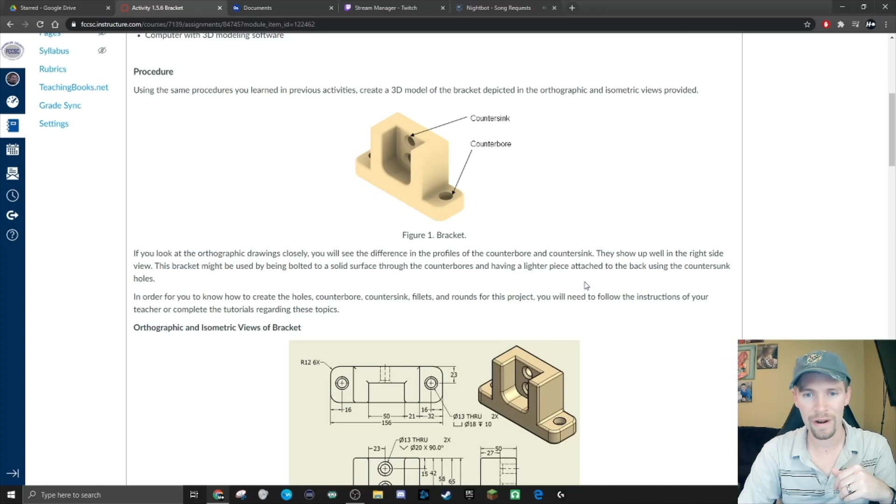If you look at the orthographic drawing closely, you'll be able to see the differences of the profile between the counterbore and countersink. These are two new types of holes that we haven't used yet, but I will show you how to use those here in a bit. In order for you to know how to create holes, counterbore, countersink, fillets, and rounds for the project, you'll need to follow the instructions of your teacher, which is why I'm making this video.

So we're going to actually go to Onshape. We need to be in our folder with your name in your practice folder, and I took all the other documents out just to keep it clean, but you can leave yours in there. We're going to go ahead and create a new document, and we're going to call this bracket. You can probably call it 1.5.6 bracket.

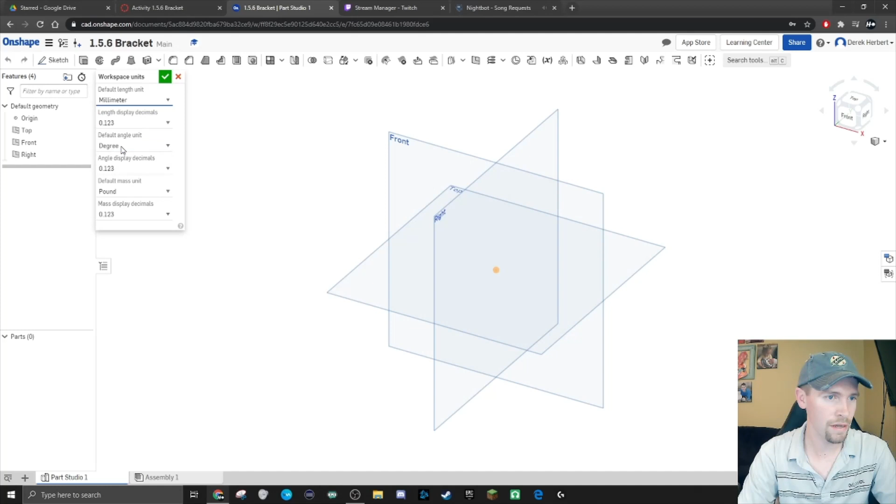Now once we're in here, back when we used to use Autodesk Inventor, we'd have to actually create a new millimeter document. And here it's really easy. We're going to go to this little 3 lines document menu, click on workspace units, and click on millimeter, then save that.

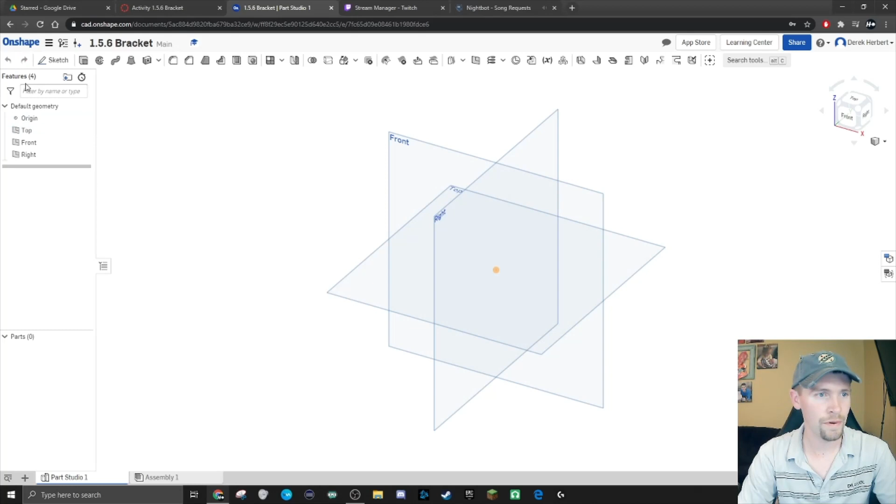So now if we go back to our instructions, we selected millimeter. We're going to sketch a rough rectangle. We need a 50 by 156 rectangle, and it looks like we need it longer than it is tall. So to start a sketch, we're going to click on sketch, click front view, click front on the view cube, right click, and hide all planes.

And we're going to sketch our rectangle up here. Corner rectangle, not a triangle, don't need any triangles in here. So it needs to be 156 wide. 156, enter. And is it 50 tall? Double check, yes, 50 for the height, enter.

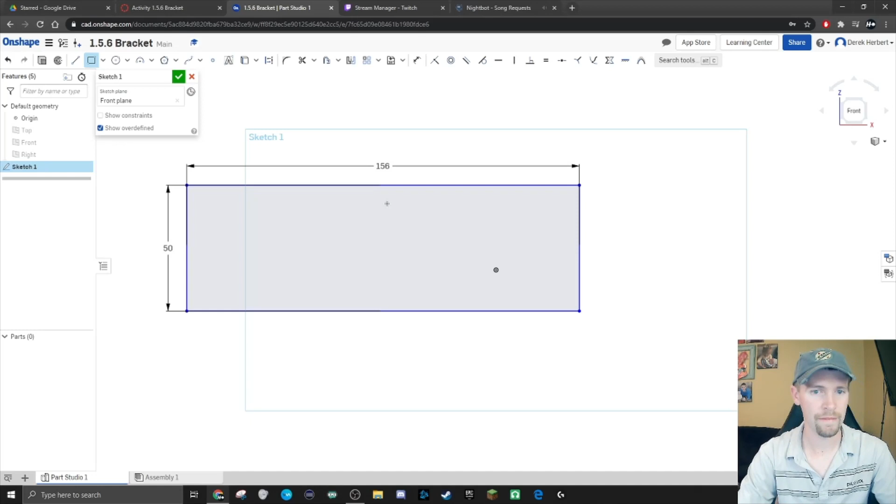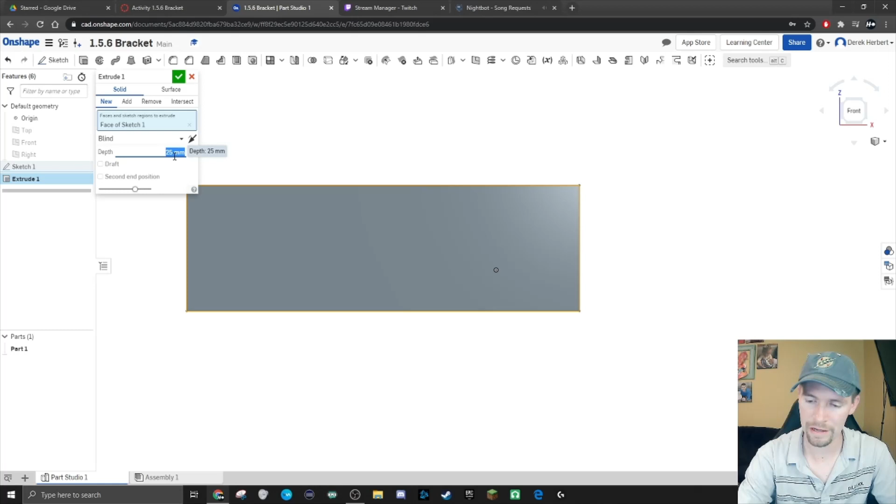That doesn't look right. Why does it not look right? 50 by 156. Alright, it looks good. And extrude 87. So 50 by 156, finish sketch with our green check mark. And extrude 87, maybe that's my issue. Extrude 87 millimeters. Let's check out and see what we got.

There we go. Okay, so it's just looking kind of funky. I don't know why it looks funky. That doesn't make much sense to me. But okay, save it as bracket. We already saved it, great.

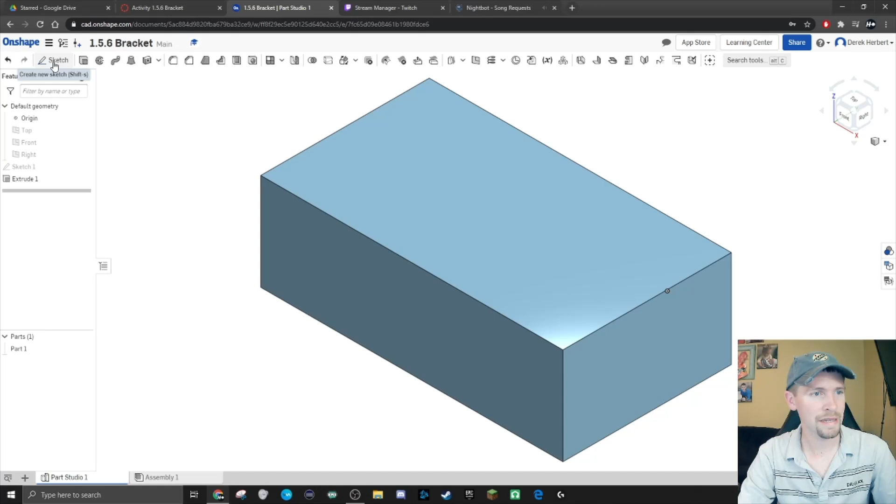So now we will cut away the sides. Create a new 2D sketch on the largest face of the part. So our largest face is up here. We're gonna click sketch, click on the largest face of your part, which is up here. I'm gonna click over to the top, and now we can start sketching.

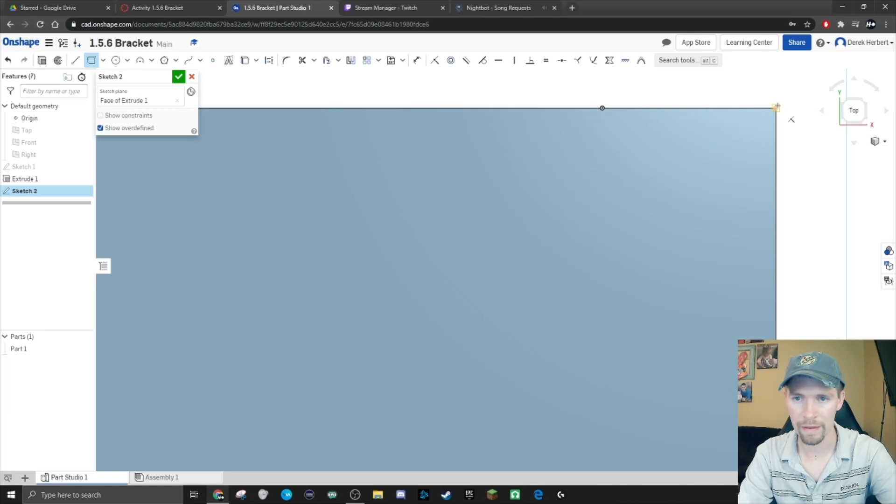So using the rectangle, draw a rectangle in the corner. Add dimensions shown, so it's 32 by 65, and extrude it. We're gonna make a corner rectangle up here in the top corner. Oh, I am not right on the corner, that's bad, we gotta be right on the corner. Perfect, okay, and it's 32 wide, 65 tall. 32 by 65, and we have our corner.

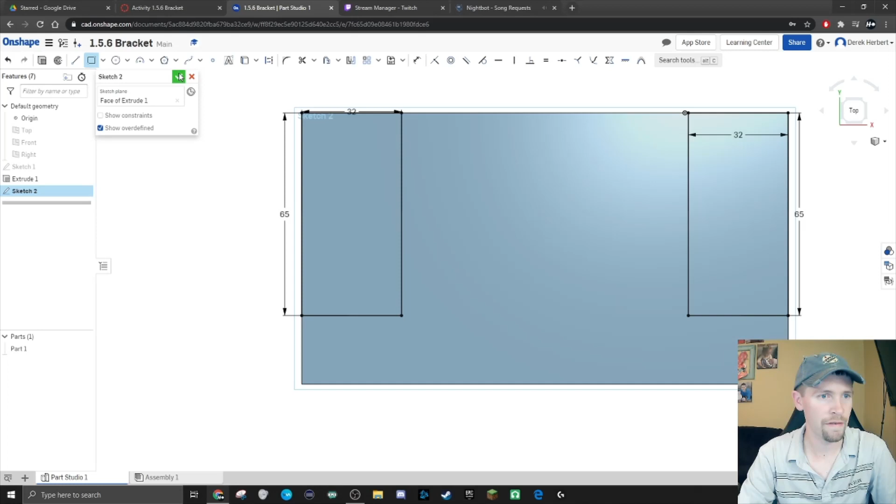Excellent, we're gonna do the same thing on the other side. 32 by 65. And we're gonna finish the sketch. I think we're going to extrude it. Extrude both of these, we're gonna remove it, and we're gonna go all the way through all. Slicing and dicing.

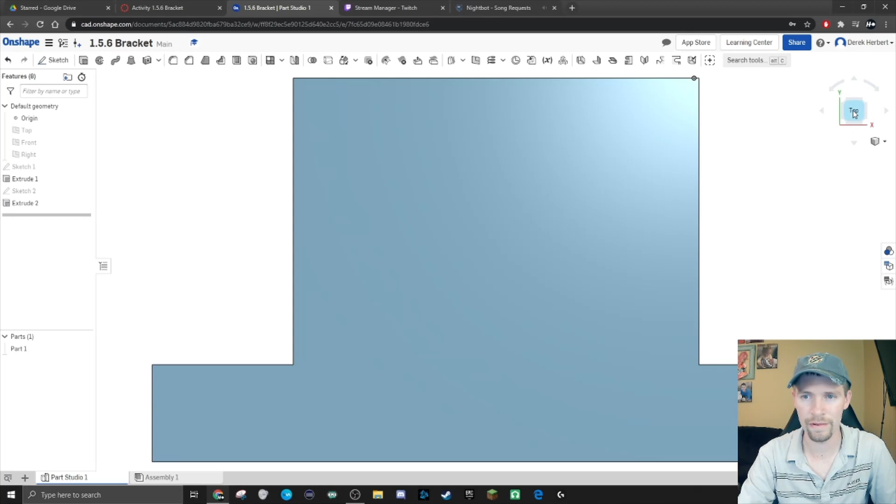Alright, excellent. Oh, I do not like that though. Come on, rotate it just enough. There we go. I need to figure out a way to set this as my home view, that would be nice, or even to make this my front. Create selection... no, I don't know if there's a way to turn this to my front or not.

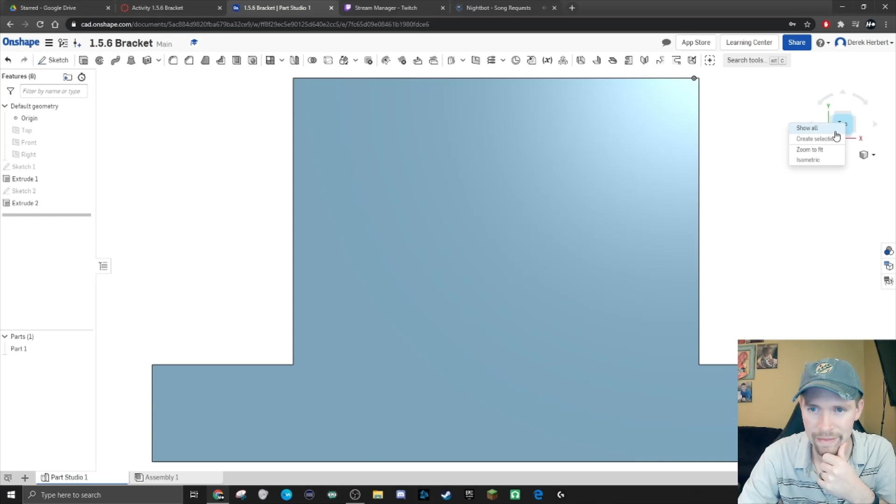I just don't like that, that's kind of annoying. So you can use the right click on your mouse to turn it sideways a little bit if you want to go to that isometric view, which is fine. I wonder if there's a way to make that part zoom to selection. I wonder if you know what, you can make this front face.

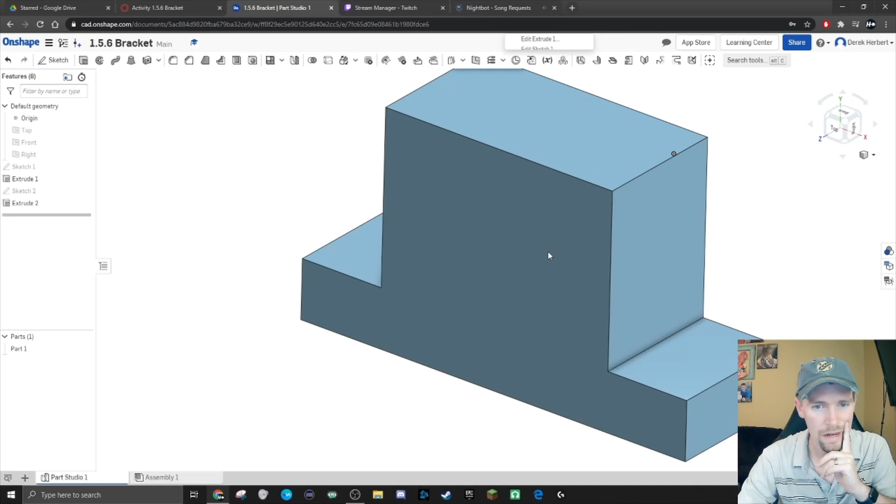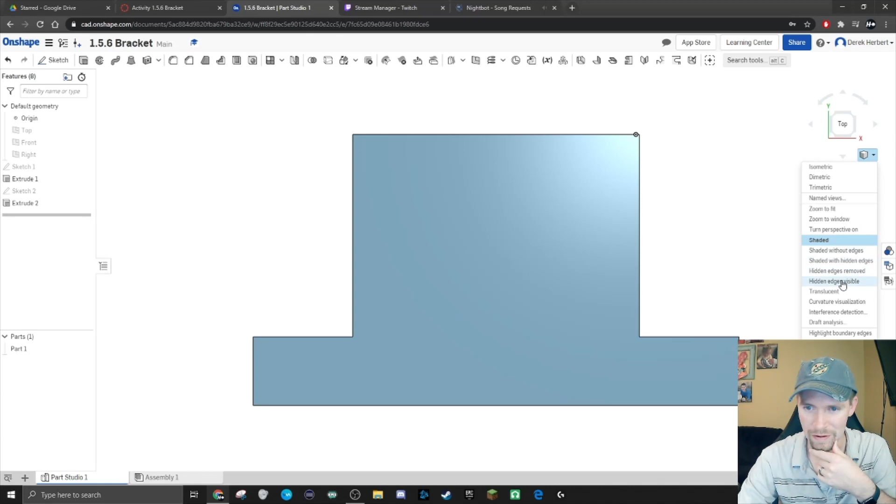Oh, I don't see it. Make transparent, export, clear selection. Nope, okay, well that's nice. I want this to be my front view. I can't do it. Turn perspective on? No, definitely not. Okay, whatever, not gonna work for me. We'll move right along.

So we cut that off. We're gonna cut this off too. So it's 50 across, 21 millimeters from the side, and 29 millimeters from the bottom.

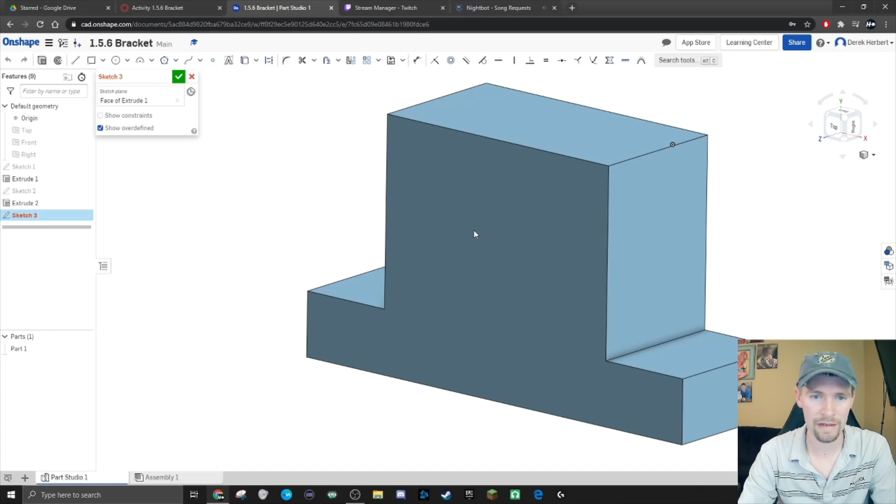Let's go back to Onshape. We're gonna make a sketch on this face and view normal to it so we can look straight at it. Make another rectangle up here on this line. We don't know how tall it is, but we know how wide it is - it was 50, so we'll type in 50 there. We're gonna leave this one blank down here for now.

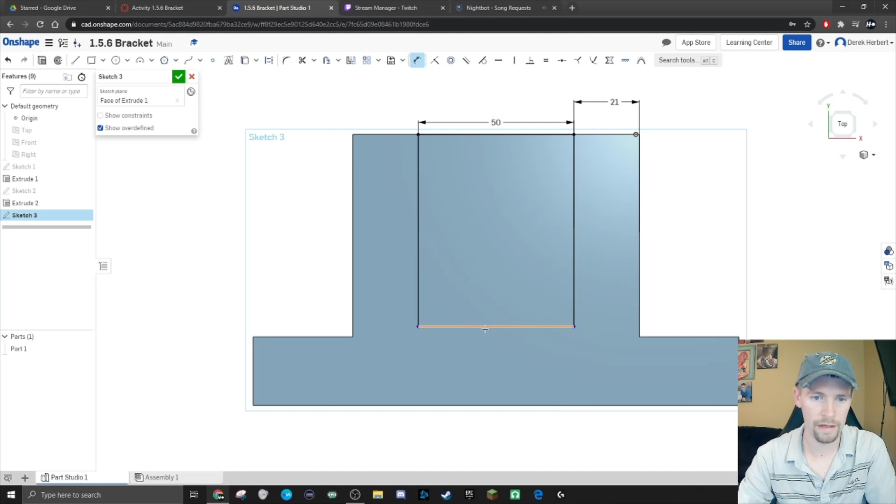We're gonna go to our dimension tab, and from here to here should be 21, I believe, and 29 from the bottom. So click here to here - should be 29. That'll fix our distance for that one.

It's good to go, and we're going to extrude this. Oops, nope, not sketch - extrude our rectangle, we'll cut it. Let's see how far do we need to cut this.

Create a sketch, depth of 27 millimeters, right there. 25 is close, we want 27. Enter.

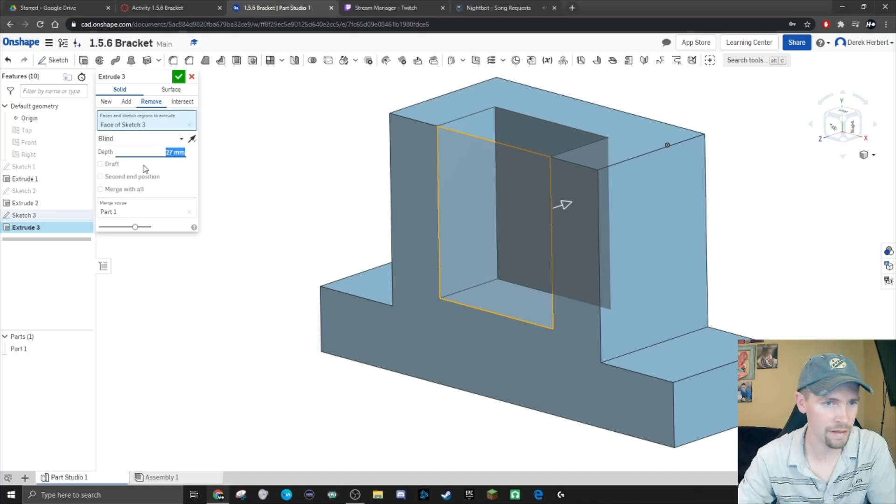Excellent, alright, so we're moving on here. We're going to make our counterbore holes on the bottom of our bracket. So we need 2 points on both sides - they're going to be 23 away from the back edge and 16 away from the side edge.

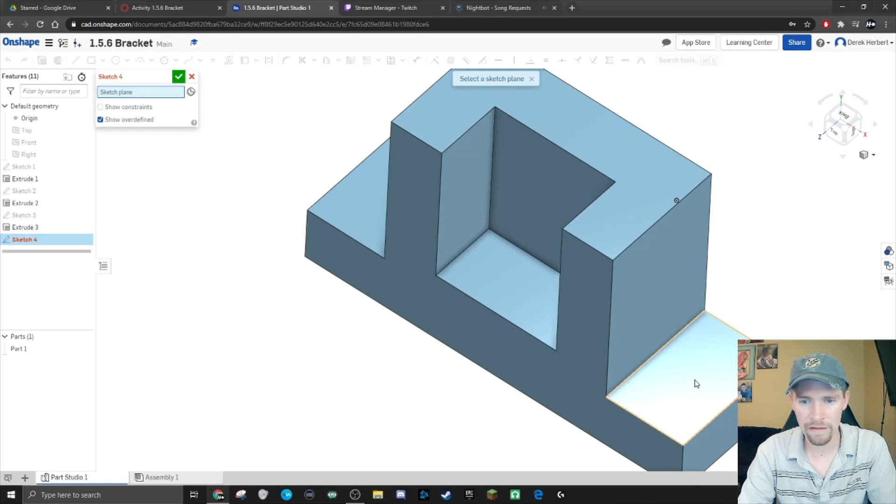So we're going to go back to our bracket, make a new sketch on this face, and we're going to look straight at it - view normal to sketch plane. Place a point right here on the center, and we'll place another point over here as well.

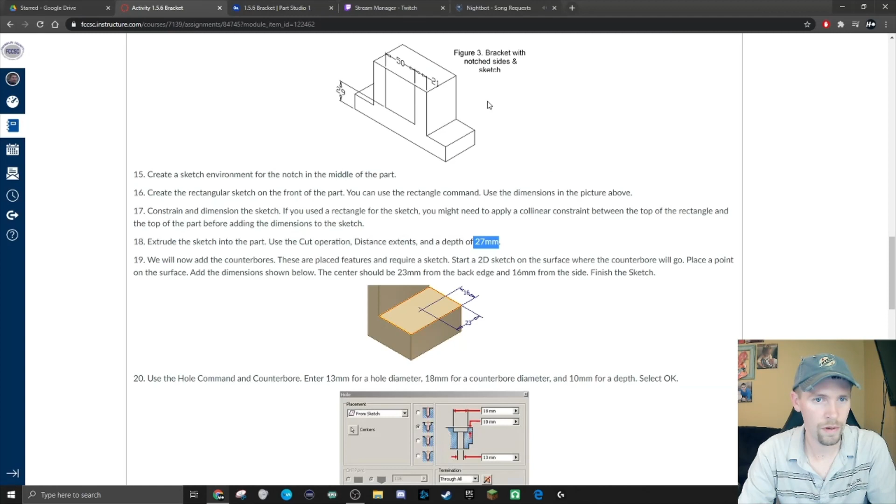And our dimension key from the top to the point was 23, and 16 is the other one - 23 and 16 from the side. Over here, 23 and 16. Just knock them both out at the same time.

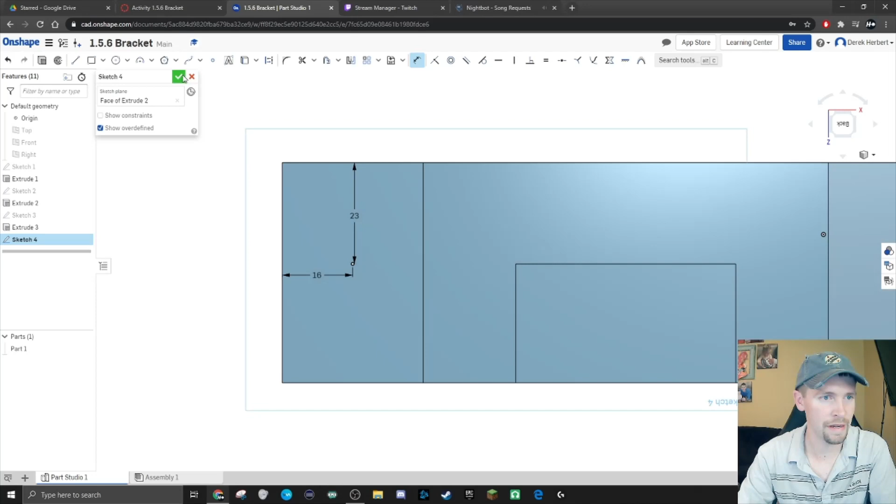That's pretty good. Finish your sketch by clicking the green check mark, and we'll go ahead and rotate it around, zoom in a little bit. There's our 2 points. So the next part is our hole.

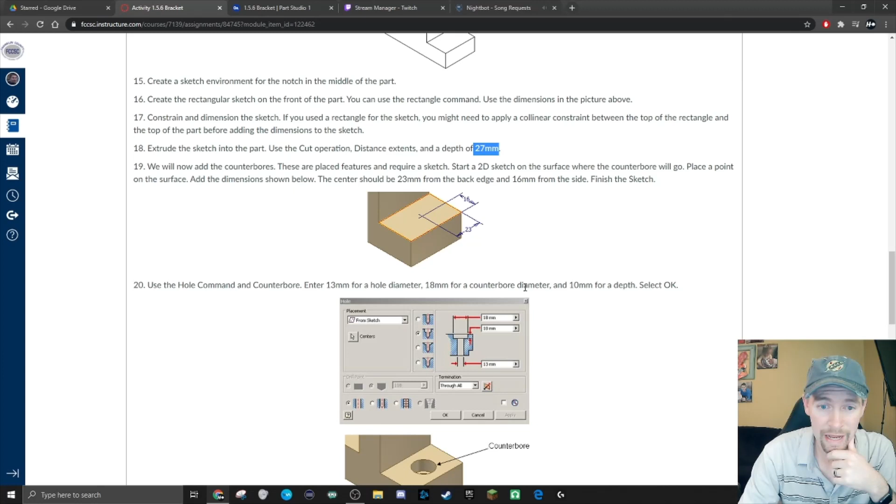Let's see, the hole - we're gonna make a counterbore hole, 13 diameter, 18 millimeters for counterbore diameter, and 10 for hole depth. So let's go back to Onshape, and our hole tool is right up here.

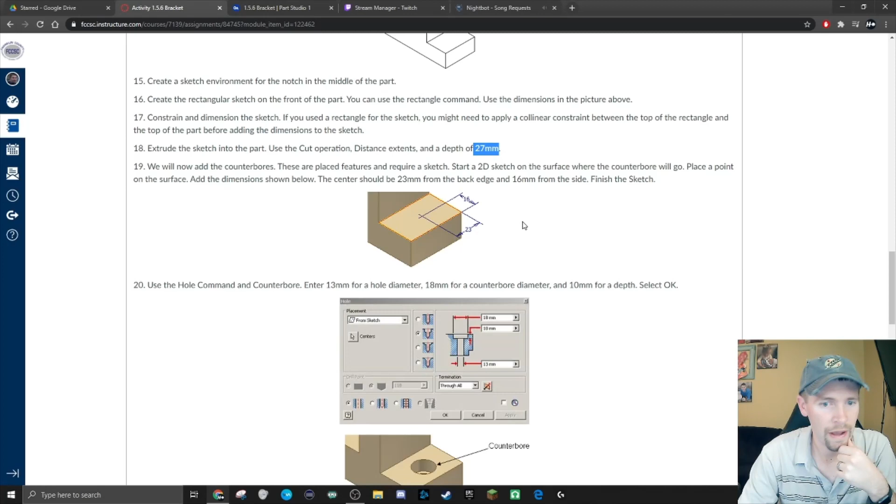Okay, we're gonna click on this point, and I think we can do both at the same time. Yes, we're gonna do a counterbore, and it's gonna go all the way through, I believe - yeah, so it's through all.

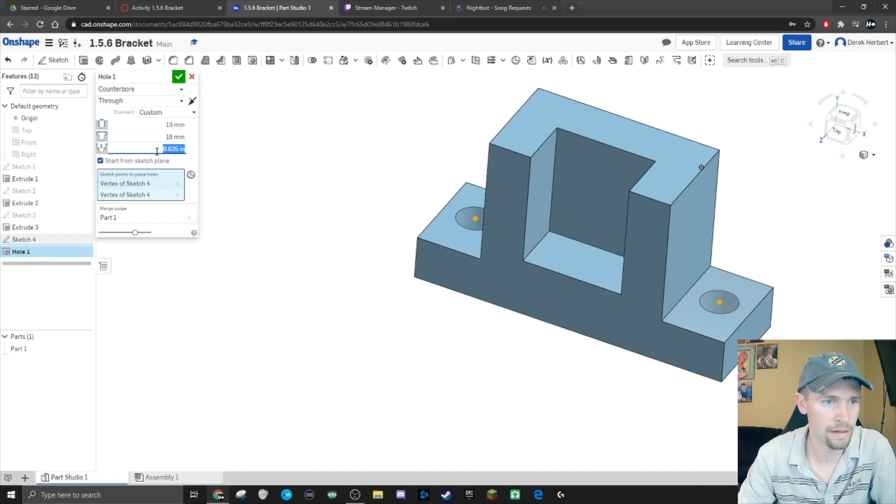We're gonna go to custom. The hole diameter is 13, so 13 for the hole diameter. Counterbore diameter was 18, and counterbore depth is 10 - oops, not 13, just 10.

All right, let's double check and make sure that looks good. Looks fine to me, save it. So 13, 18, 10, save it. Nice, we got a couple of holes in there. Excellent.

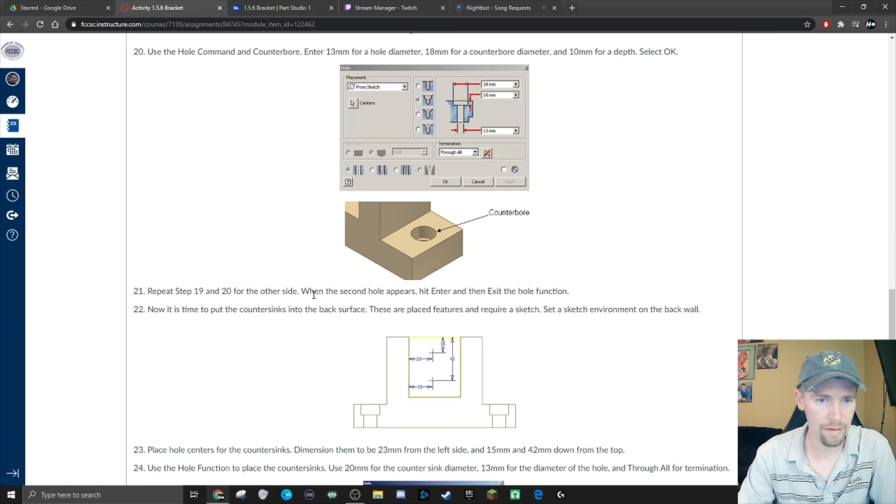Moving on, so now we're going to put 2 more holes for the back of this bracket. Looks like it is 15 from the top and 42 from the top, 23 from the side.

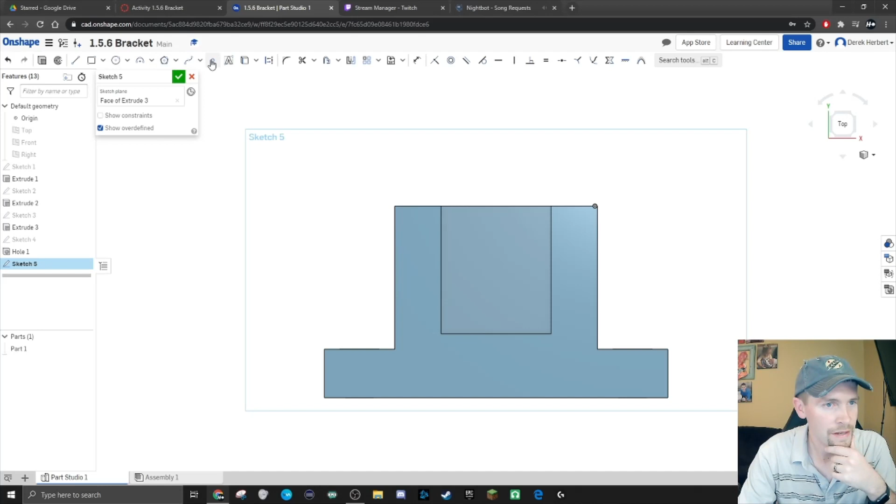So we're going to make a sketch on this back plate back here. We'll view normal to that sketch plane - view normal to sketch plane. Okay, we'll place 2 more points, 1, 2.

And dimension them. So both these from the side, I think, are 23. Let me double check - 23, yep. 23. And then from the top, we've got 15 and 42.

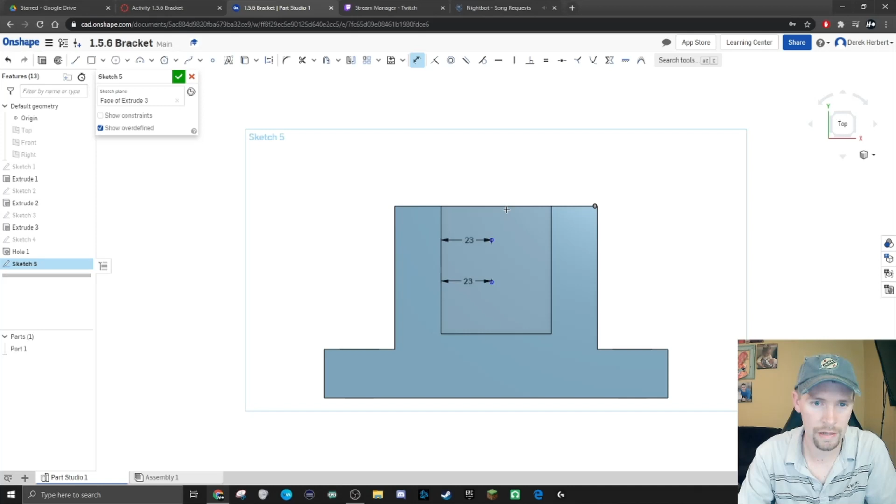So top to this one is 15, top to this one is 42. Excellent, so we got our 2 points done. Finish that by clicking the green check mark.

We'll go to the hole tool next, click on both of those points. And we have to change this - I think this is a countersink, so we'll go to countersink mode.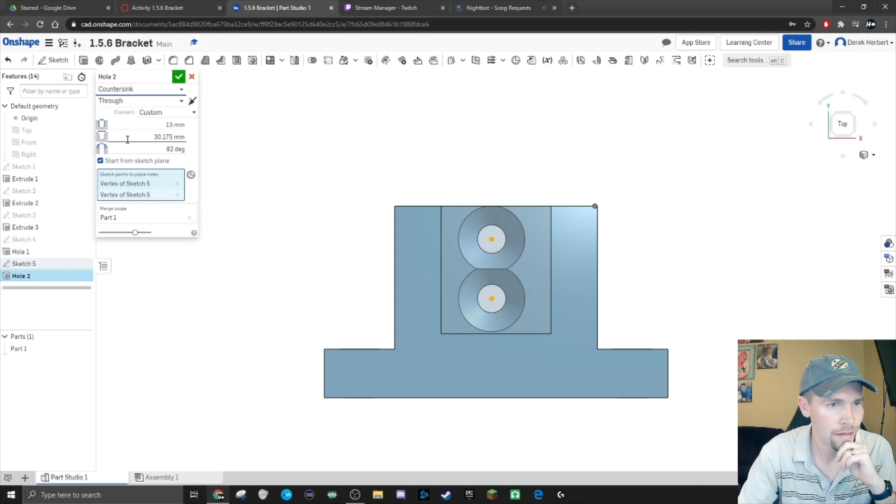It's going to be another hole with 3 parameters. Alright, so 20 millimeters for the countersink diameter - it's 20 millimeters. 13 for the diameter of the hole - we're going to leave that 13.

And 82 degrees - theirs is at 90 degrees, so let's go ahead and put it to 90.

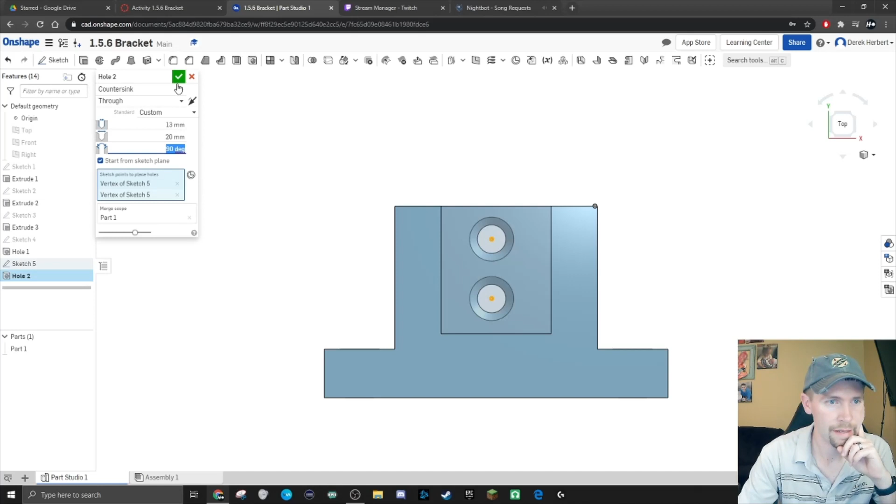There we go. Alright, so a countersink looks kind of like a funnel, I guess, and a counterbore is more just flat at the bottom. So that's kind of the difference between a counterbore and a countersink. Every time I think of countersink, I think of like the kitchen sink, like it's a drain - this kind of looks like a drain to me, so that's kind of how I remember countersink versus counterbore.

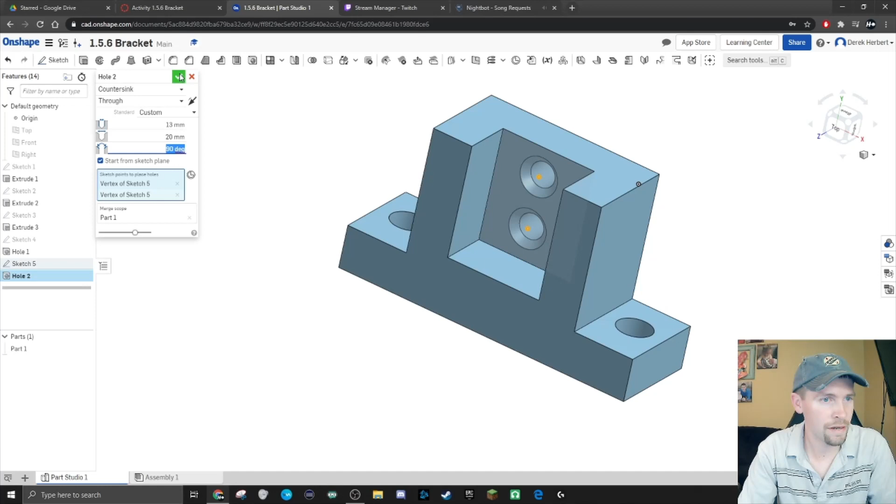Alright, so that looks good to me. Click green to check it and finish that part of the sketch.

Alright, we're about to wrap it up here. Yeah, we're at the end. Fillets - so we're going to add fillets to this feature. Radius is 12 millimeters. So let's go back to Onshape.

We are going to fillet this. Fillet is the rounded edge - remember, we got round edges and like sliced off edges, kind of like the countersink in there, those are chamfers. We want the fillets for this part. We'll click on fillet, radius is going to be 12 millimeters.

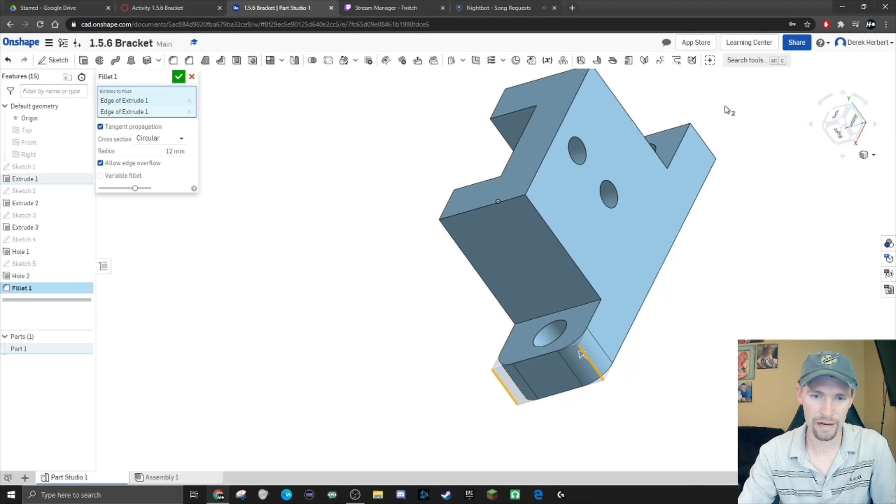All right, we're going to fillet this edge and this edge and these 2 edges - sorry for it being upside down, but that's the way it goes - and these 2 inside edges, 1 and 2. There we go, so 1, 2, 3, 4, 5, and 6 edges.

Select that, and that class is finished. That's the way we want it to look.